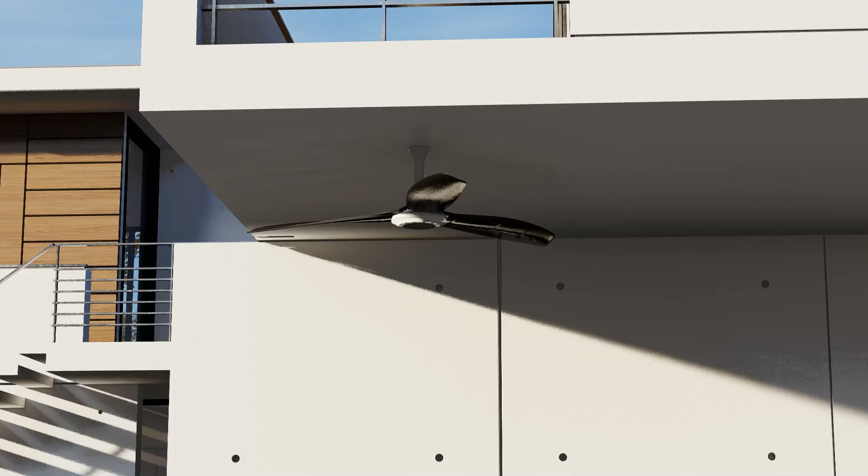What we're going to be focusing on today is how to get a model from the 3D Warehouse, and then we're going to take it into Blender to animate it. And I'm also going to show you how to take that animated object in Blender and then bring it into

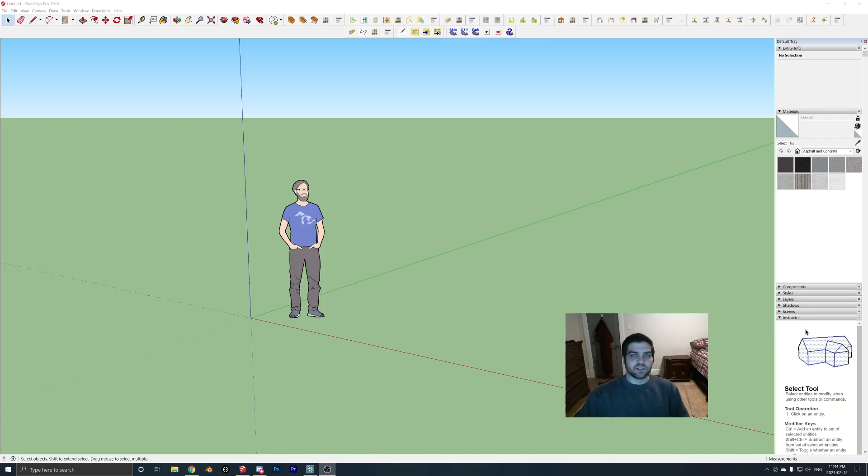Lumion for certain animations. I hope you enjoy the video.

Right, so the object that we're going to be animating today is just a ceiling fan. In my opinion, it's probably one of the easiest things to learn how to animate doing this workflow, just because all it is is rotating, and it's just setting up the keyframes correctly, and it just kind of rotates itself.

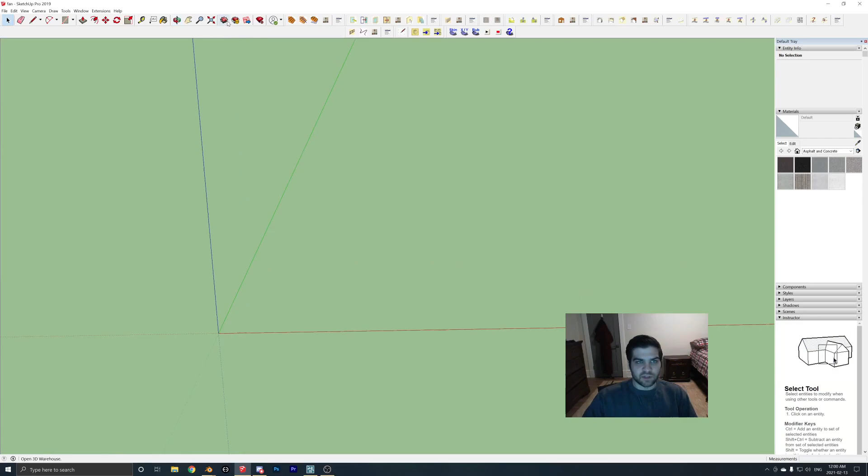So what we're going to do is we're just going to go to the 3D Warehouse, type in fan. This is the one that I was using, the Haiku fan. So I do recommend that you get this one, but it's not too important. Kind of explode this. And then what I'm going to do is I'm just going to join these together.

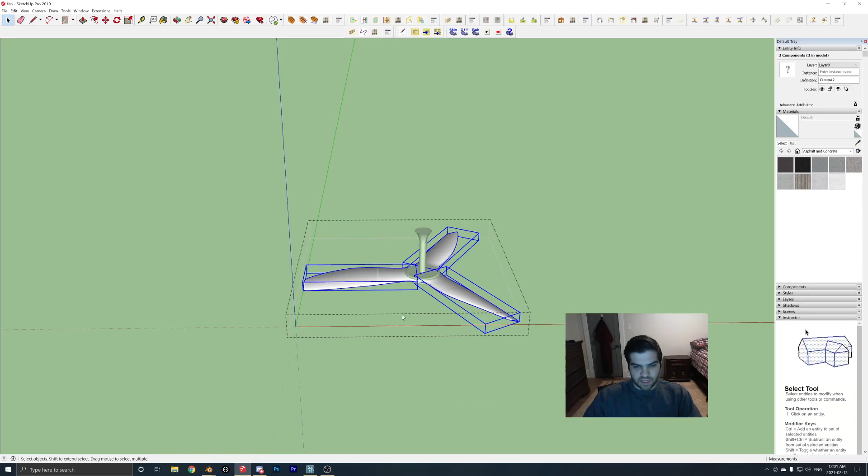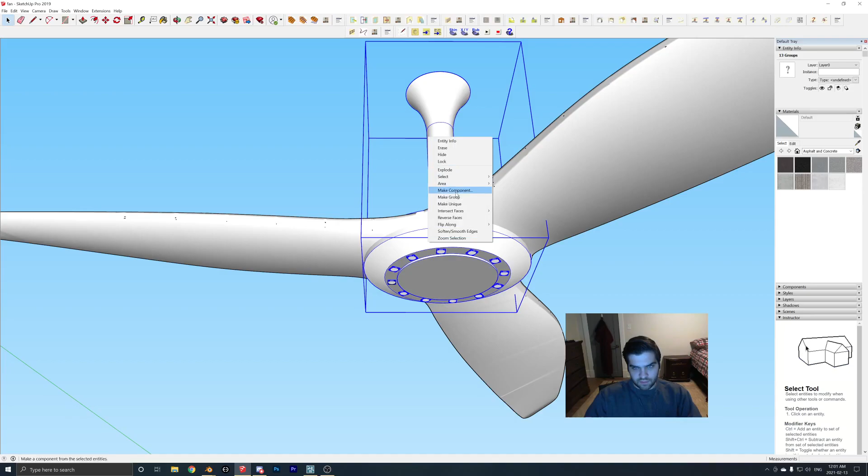Yeah, just a little bit of SketchUp work here. I'm just kind of combining groups. You don't need to do this, but I figured I might as well just do it in here. And this, we're going to combine all of these. Right. Make group. We're just going in here and explode them.

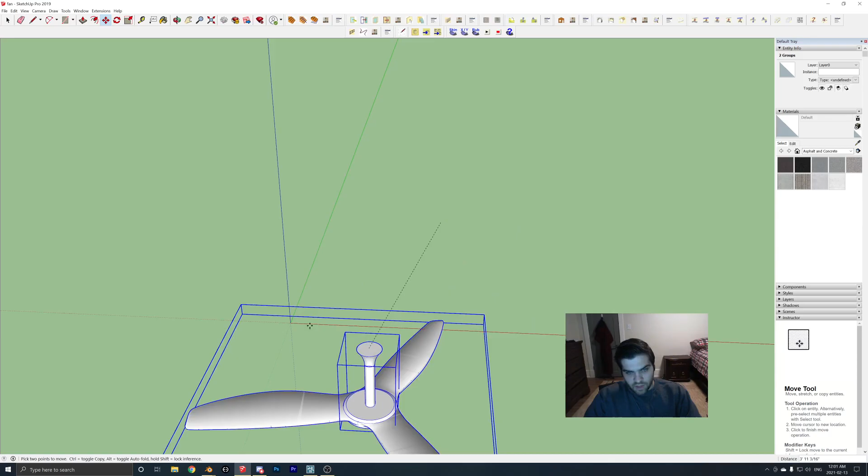Right, okay, so that looks good. And the other thing I'm going to do is I'm going to grab these. I'm going to grab the base here. I'm going to hit M, and I'm just going to drag it onto the origin point. So I've already saved this as fan, so this one's basically good to go. And then I'm going to open up Blender once we get that far.

Now, I'm going to be using the SketchUp importer for this, and I'm going to show you a few things that I do just to clean things up. And if you feel like you're getting lost at all during this tutorial, I do have something called Screencast Keys on. So if I click these buttons, as you can see, what I'm doing will pop up on the screen. So I'm going to be saying it out loud, but just in case you get stuck, just look there and you should be okay.

Right, so I'm going to use the SketchUp importer, fan. All right, so as you can see, when we import that, it comes in like this, right on the origin point where we want it. And if I click this, as you can see, we only have two groups because I combined them all in SketchUp the way I want it to be. So they are named a little bit weird.

So what I like to do is come in here. I like to click on the base here, hit F2. I call this one base. Click on the blades here, F2. We'll call this one blades.

Pretty simple. So right now, if I was to hit R for rotate and then Z on the Z axis, this is what happens. So obviously that's not what we want. We want it to rotate on itself. So what I recommend you do is you just click on the blades because they're all together, go up to Object, and then go to Origin to Geometry. Make sure you're in Object Mode as well. By default, it should be, but if you are having trouble, make sure that it's in Object Mode.

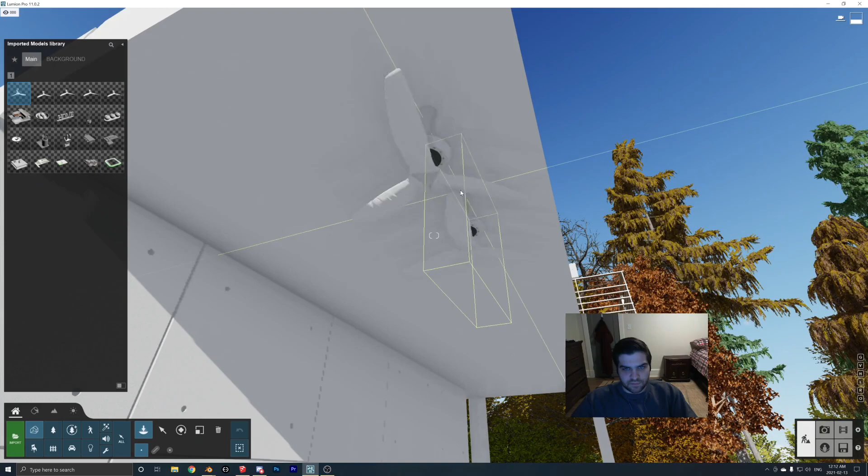Interesting, why did this one do that? Let's see if all of our scales are applied. So that looks like it's okay. Maybe if I unlink this. So yeah, it wasn't doing that when I tried earlier.

Weird, okay, well let's see, let's get rid of that empty and see if this one works. So we'll try this again, FBX fan 2. Yeah, everything looks like it should be good there. So we'll just get rid of this altogether and import another one.

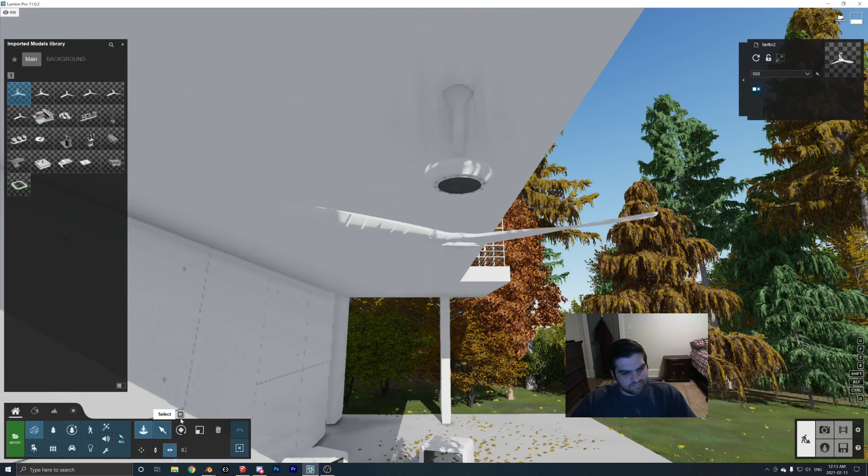Right, so I was just troubleshooting that, and this is the kind of thing I was talking about with the auto keyframes being weird. I wanted to leave this part in because I feel like this might actually be important troubleshooting for someone.

So what was happening is I pulled it up here. Everything looked fine, but watch what happens as soon as I move this. It's because I think it was because the auto keyframe was on.

So what I'm going to do is bring it so it's like here. I think that looks down a little bit. I think it was actually up here. I think that should be good enough. What I'm going to do is take this and hit I so that it turns yellow up there.

And then I'm just going to move this down to here. I'm going to click here, copy and paste this in again, hit I. Copy and paste, we want it to be orange. Hit I, and do this.

Right, so let's hit play again and let's find out if this worked a little bit better for us this time.

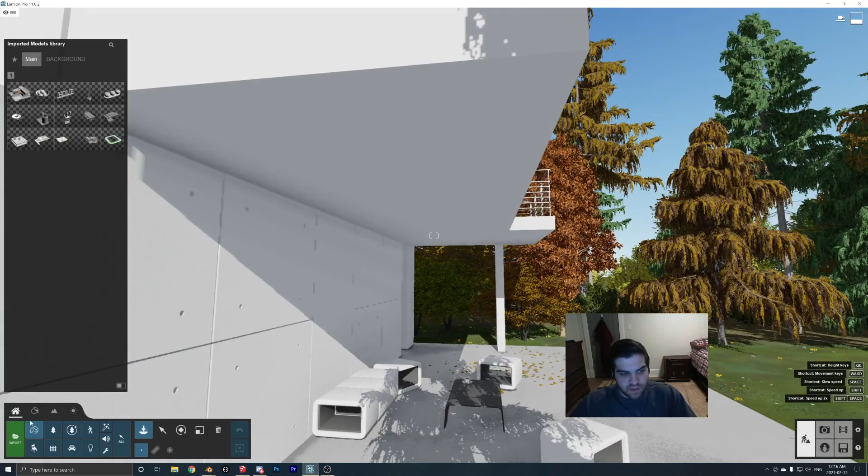We'll just save this quick, call this fan, and export. FBX is working better, so we'll do this a third time, and then I will import FBX fan 3. Let's see if this works a little bit better.

Right, so it's doing this really choppy thing here. So, all right, this is another troubleshooting thing. Like I said, this video is a little bit messier than I want it to be, but I actually think this is kind of important because we're going to learn more of this.

I think Lumion can struggle. What I changed earlier is I made it so this is all linear, so Blender knows how to kind of go in between these. But I think for Lumion to work properly, you may have to actually put every single one in. So even though it's weird, we're going to come up here and move this one by one, the frame here, then hit I over here. What that's doing is creating the keyframes, as you see, whenever I do that, we get a little diamond down here.

This is the kind of stuff that you're definitely going to run into. And also, that's not the one you want, click the rotation.

Like I said, this is definitely not a very clean video, but I do actually think that you'll learn more from watching me struggle with this stuff and fixing it than just watching me breeze through it quickly, because these Lumion animations are really weird. Sometimes they don't work as well as they should, it seems very inconsistent. Literally, I went through this stuff, I feel like I did the exact same thing and the fan just spun normally with no problems. So I don't know if that's just kind of the nature of it, but you do kind of have to learn a couple little things just to make sure everything works. And you may have to do a little bit of trial and error, but if you can get it working, then it gets saved in the Lumion library and you never have to do it again for that particular model.

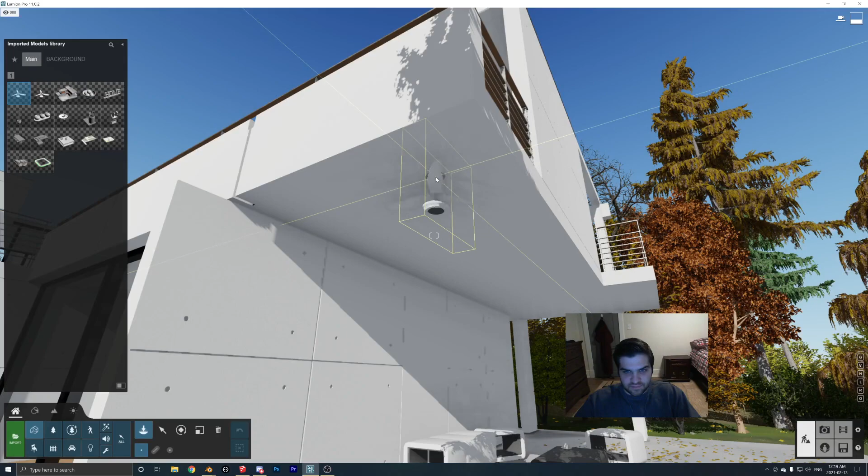Right. So why would that be happening? Let me try a couple things here. So what I'm going to do is save this, close it, and reopen it.

Let's just try exporting it again and see if this makes any difference. Might not, but like I said, you might as well go through and check off every box. Let's just call it something different, I'm going to name this something else. I don't actually know if this is the case, but it did seem like sometimes when things were named very similar, they were having trouble. Again, this might just be coincidence because, as I said, I was having some difficulty with that.

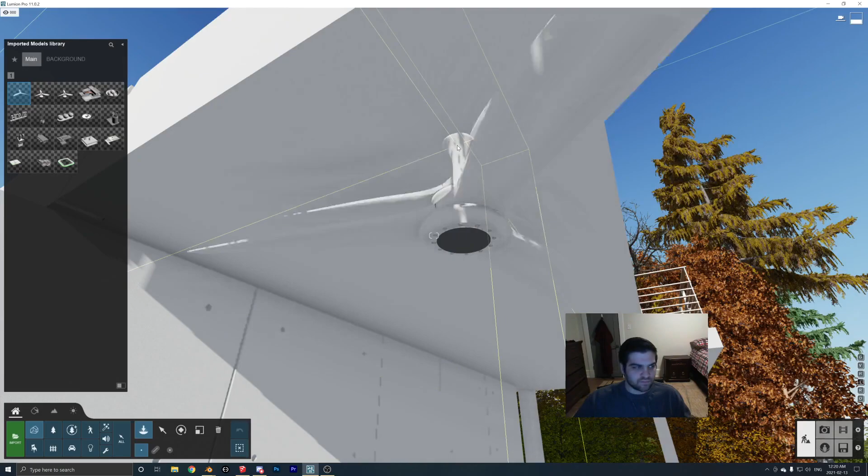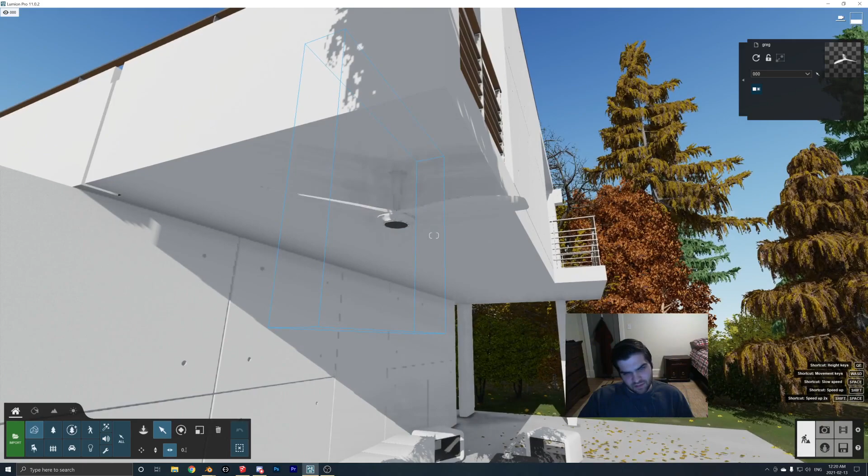Right, so let's try this again. This is exactly what I'm talking about with how I don't understand how that happens. But all I did was close the Blender file, reopen it, and then name it something else. Now it does seem like there is a bit of a weird stutter, I can't really tell if that's entirely there. I think it looks good, I think it's good enough. As I said, it's definitely good enough just to have in a render. So I'm gonna render that out.

As you could tell, I left all of the troubleshooting in because I don't know what trouble you're gonna run into. These are all things that you just kind of have to do trial and error with. And I am going to get into more complex animation, so all these little things that will help it work, or just kind of make it fail, you do have to sort of understand that and how you can correct them. So that's why I put so many little troubleshooting things in, because those are all things that I found have actually worked one time or the other to get it working inside of Lumion.